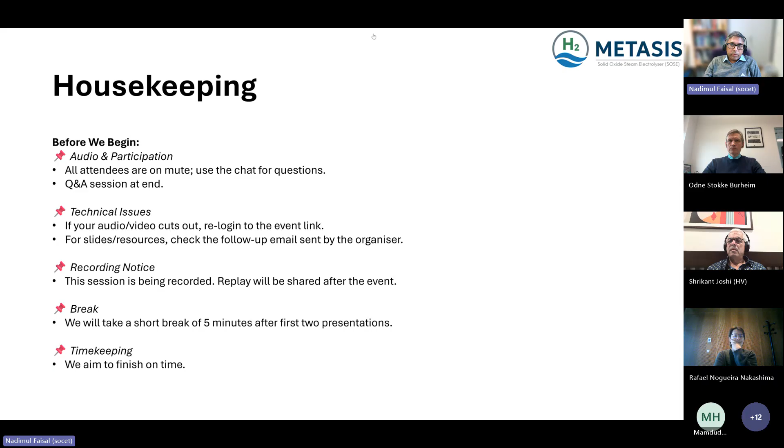Thank you, yeah, thank you. Just one second there, very nice introduction. Okay. Can you see this now? Yes, we can see. Does it make sense what you see, or is it very broad? A bit strange, but we can manage. It's all right. On my screen it's elongated with your slide, just a small part of it. I don't know how others see it, Faisal. Yeah, same here. I need to share it in a slightly different way because I have such a wide screen. Okay, I'll do it like this—is it better now? Yeah, it's better, this is good. Can you see my cursor? Yes, okay, that's very good.

Okay, thank you for inviting me. Today I wanted to talk a bit about the role of solid oxide electrolysis cells in a process called biomass to liquid. The idea is if we take trees as part of a natural carbon cycle and essentially burn them in an entrained gasifier with just a little bit of oxygen, then we can create the syngas. If we do that, we can do Fischer-Tropsch afterwards, and then we have, for example, kerosene that can be used for long-haul aviation. There are some shortcomings in this process—it only uses about 40% of all the natural carbon cycle carbon. Solid oxide electrolysis can make a couple of really good contributions there.

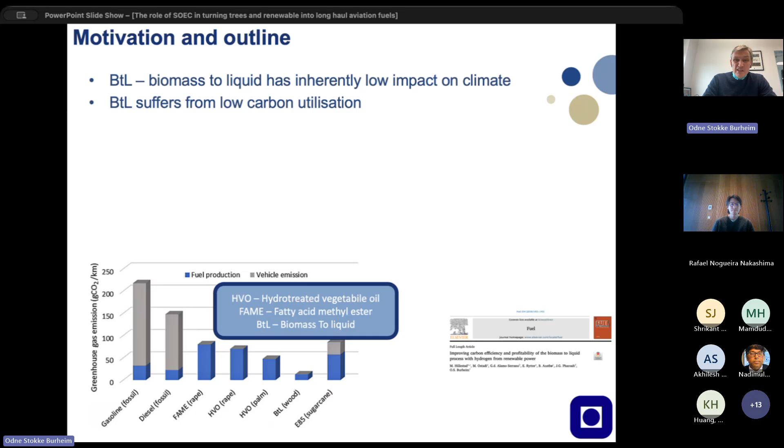So compared to different other types of fuels, BTL is a very promising carbon neutral fuel. It suffers from low carbon utilization, I'll come back to that a bit later. The other thing I want to mention is 2% of global climate emissions stem from the aviation sector. So fighting CO2 emissions in the aviation sector isn't really that big, but I guess since decision makers have a lot of carbon guilt over traveling so much, we still care a lot about this.

If we look into the aviation sector, I think 20% of the emissions from the aviation sector is from flights that are less than 1,500 kilometers. So that's about the length of Norway - if you go from south of Norway to south of Italy, that's the type of distance we're talking. So this type of aviation doesn't really contribute that much, and it's also the only one that can be electrified. But for the remaining 1.5 to 2% of global emissions, it needs to be tackled by combustion and use of turbofans.

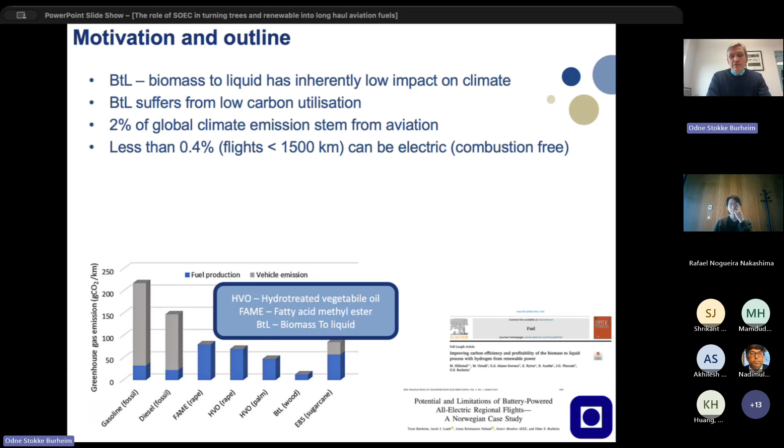So the BTL process, as I mentioned, it starts with biomass coming in, envisioned as forestry waste essentially. It has a pre-treatment, which is essentially drying. It goes through an entrained gasifier, where wood chips together with pure oxygen under stoichiometry creates a syngas that then goes for a bit of cleaning.

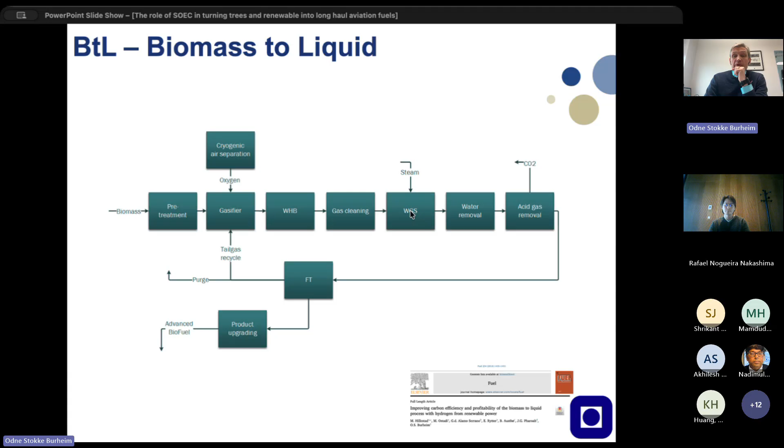And then, by adding more steam, we shift carbon monoxide into hydrogen and CO2. So because when we add steam, we also tie up more of the carbon that could potentially have been fuel as CO2, then the carbon usage or utilization is kind of low.

So that's where we think it's very good to add solid oxide electrolysis, and we have done a lot of modeling work around this. Further, one removes some water as well as some CO2, and then you do Fischer-Tropsch and you have products. So I have a simplified sketch at the lower end of my slides, showing how you can take 100 units of energy in the biomass, or 100 units of carbon, and out comes a little bit below 40% of the carbon in the fuel, and also just over half the energy that's embedded in the biomass.

So now we talk about power BTL. That's essentially when instead of feeding water into the water gas reactor, we're feeding hydrogen. And so then that becomes a reverse water gas shift reactor, and you can see that here. It goes through the same cleaning procedures, and actually, because of the balance between carbon monoxide and hydrogen, it makes sense to have 3 stages of Fischer-Tropsch, and that gives products.

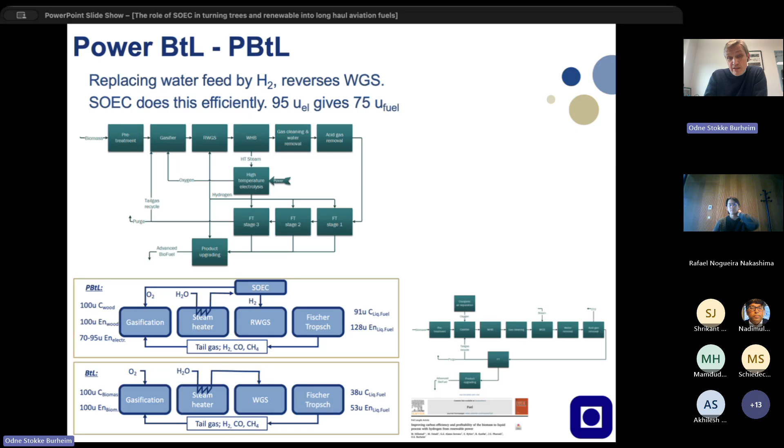The other thing one can see, because this also requires electric energy, if we compare adding 70 to 95 unit equivalents of electric energy, we get 75 more units of energy in the fuel. So this kind of means that we have a very high conversion of electricity into e-fuels and e-SAF. And so in that way, we can envision a wind farm collecting wind, accelerating that through hydrogen, solid oxide electrolysis into a natural stream of CO2, giving us fuels that can provide aircraft propulsion.

In doing this, we have done a little bit of modeling of the cell potential of solid oxides. We have also looked at heat integration. So if you preheat steam, and there's quite a lot of high temperature heat from the gasification, we can envision lowering the cell potential of the solid electrolyzer, balancing out the ohmic losses, and therefore have very high energy efficiencies. And so if you consider the wind to tank efficiency, that's almost 100%, and I think that makes this a very interesting process to pursue.

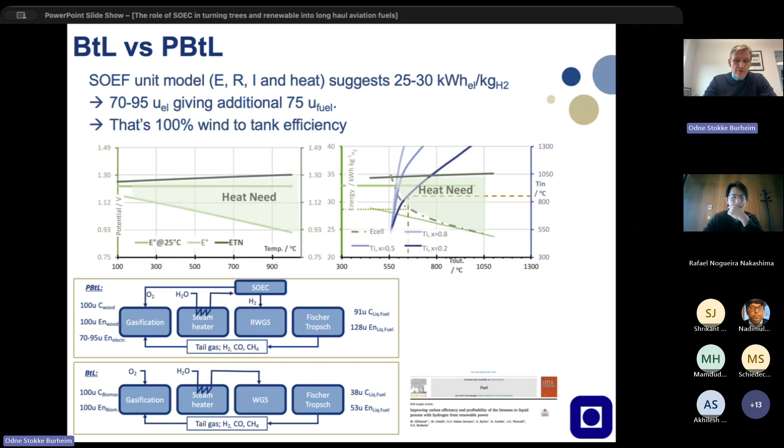So looking at the two processes, we have these mass flow diagrams where you can see the BTL. Very little carbon comes out in the Fischer-Tropsch products compared to what we put in. But for the PBTL, we have a very high degree of the carbon utilized in the Fischer-Tropsch products.

So what we thought we could maybe do to improve this further, if we look at the Fischer-Tropsch, it's quite a bit of carbon monoxide, hydrogen, and very light hydrocarbons that comes out. In the carbon stream, this also presents a bit of energy. And so this is currently fed into the gasification reactor to get more syngas. But we wonder, what if we try to do something else about this?

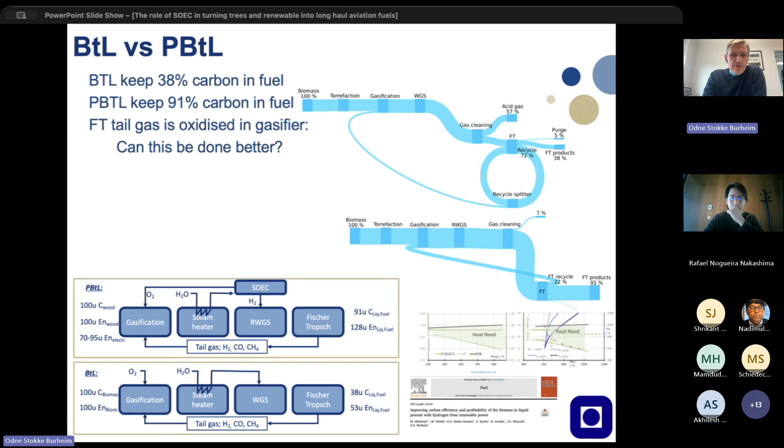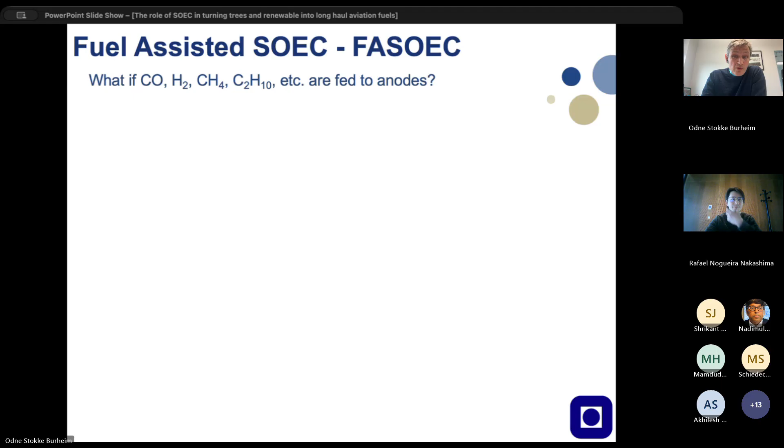So then we come to a concept that we call fuel-assisted solid oxide electrolyzer, FASOEC. So if carbon monoxide, hydrogen, methane, and ethane are fed to the anode of the solid oxide electrolysis, what's going to happen then? If you think about hydrogen only, it would mean that you take hydrogen and water on the cathode side, oxygen goes through, and because we feed hydrogen, it will just produce water. So it's essentially a hydrogen pump with oxygen going through, and this gives almost zero reversible potential.

So carbon monoxide, hydrogen, and methane are experimentally verified to do the same thing. We have also done this with respect to understanding internal thermal gradients in the cells and the thermal balance, and it looks to go very well. We have a couple of papers around this.

And what's also interesting to think about for many other processes with fuel-assisted solid oxide electrolysis cells is that you can take any fossil hydrocarbon and feed it into the anode like this, and then produce hydrogen for very little electric energy because you have available chemical energy. The byproducts of this are really CO2 and water. And if you then cool and quench this, you can envision a very beneficial CCS process. Perhaps not the sequestration part, but certainly carbon capture.

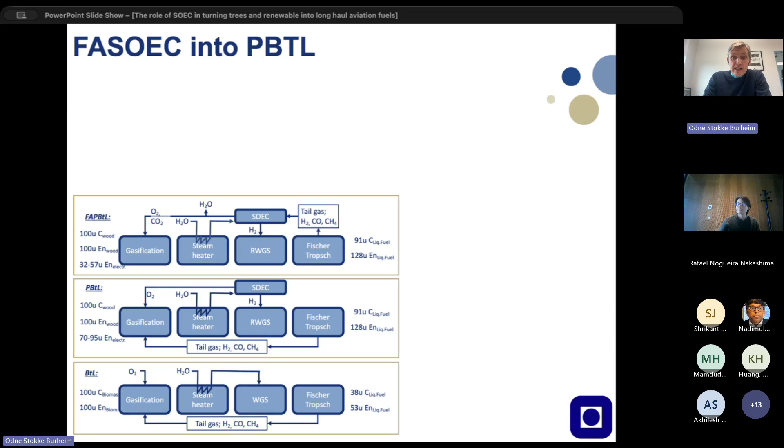But still, it's only utilizing 91% of the carbon, and we would like it to be more. Because it takes energy and resources to transport forestry material to such a site, and utilizing that carbon for making more fuel, we think would be beneficial. So that's what the FASOEC is about. It's utilizing the residual tail gas better.

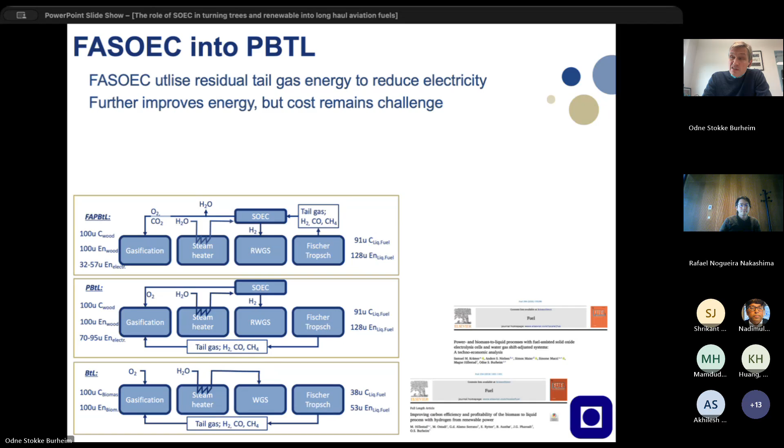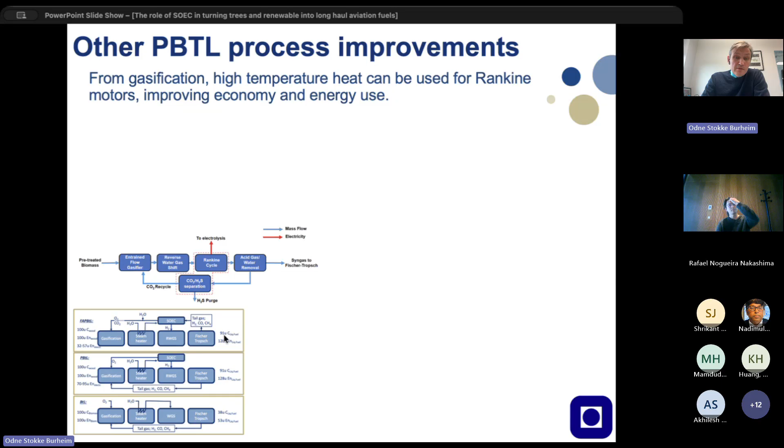The cost of such a system goes up because solid oxide cells have a cost. But when we look at the process for whether it's the fuel-assisted power BTL or just the power BTL, a lot of the carbon is lost in cleaning up the acid gas removal. So if we could separate CO2 from the acidic gas, which is mainly hydrogen sulfide, then we could recover even more carbon. And so we're talking about taking maybe 80% of the residual 9%, adding sort of another 7 points. And then we can get this 91% utilization up to 98.

And so this is an initial study. It's currently under review. So we see a carbon efficiency going up a lot with this separation of CO2 and H2S. However, also the cost goes up. So it sort of becomes a question of how much one is willing to pay for this type of additional fuel. But it is a source of carbon neutral electro-fuel, and I think that will become very important in the years ahead.

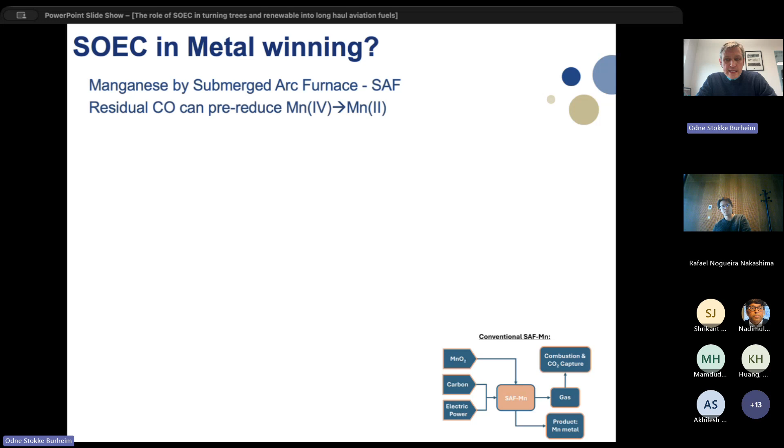This is an industry that's keen on improving. So what they did next was start pre-treating the manganese 4 with carbon monoxide to get manganese 2, so MnO, going into the submerged arc furnace.

It turns out that hydrogen does this several times faster. Hydrogen is a much better pre-reducing agent for manganese. Now, in this process, they still use carbon monoxide, but we're arguing that what if we take that carbon monoxide and

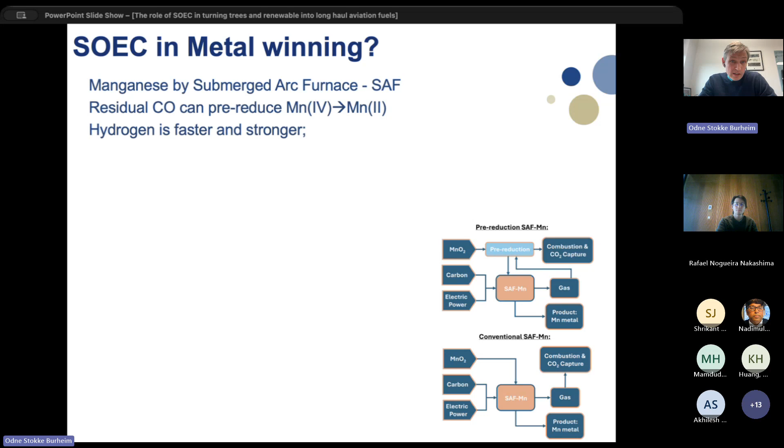feed it into a solid oxide electrolysis cell as a fuel-assisted solid oxide electrolysis cell. Then we can make hydrogen that they can either sell or use for this pretreatment. So that's essentially what this study is about.

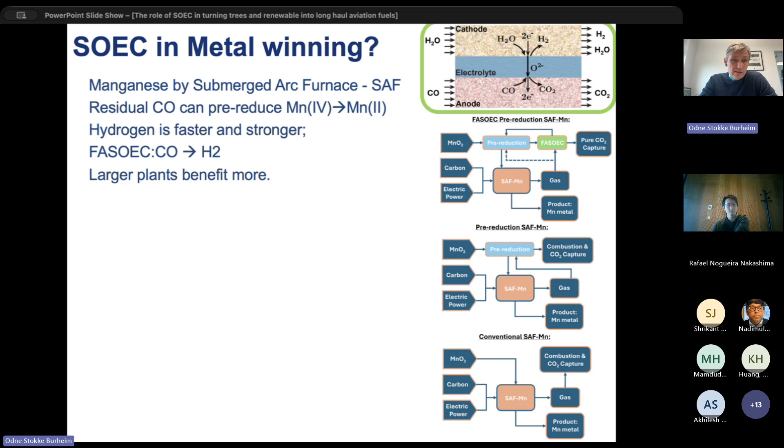Producing hydrogen from carbon monoxide, and these gases are also available at very high temperatures, so that's also good for this process. We found that larger plants benefit more from this, and preheating of steam is a bit important.

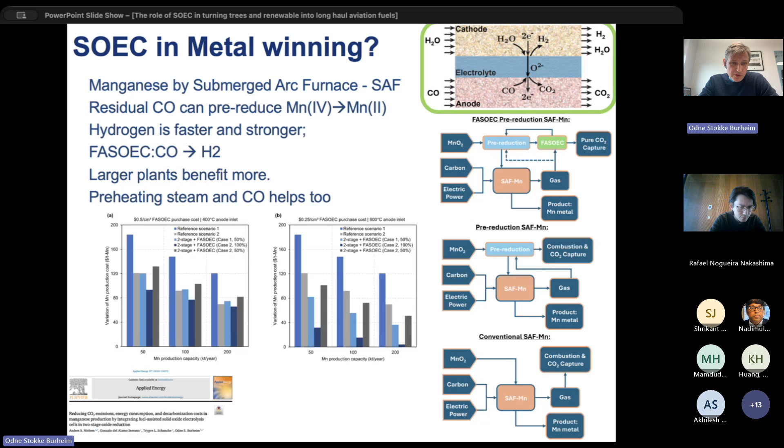And so if we look at the different cost of anodes, of electrolysis cells, we assess a price per square centimeter. It also matters a lot for how this sort of improves the economy of such systems, which we published a year ago. And that's my introduction to what solid oxide cell systems can be used for in making sustainable aviation fuel, and also in the metallurgical industry.

So what I've planned for today is divided into two parts. One is about the context of heat integration—what is the thermodynamics, what the system looks like, and what key manufacturers are saying about this. Later I will pair this with some of our own studies to exemplify and explain the possibilities and limitations in this field, and finish with a message, which I hope will be a good one for you.

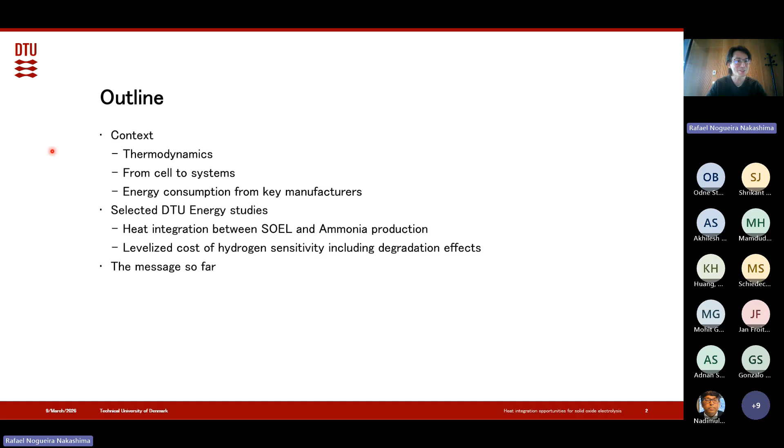So, all right, what is the context of heat integration? I found this very nice graph from Topsoe to explain where these opportunities come from to use heat to produce hydrogen. This comes from the thermodynamics. If you see this graph on the right, it's temperature versus the enthalpy of formation change of the reaction—the hydrogen formation reaction. That's this green line here, and you see something very interesting.

You see that below 100 degrees, this value, which relates to the total energy demand, is much higher than the value you have for higher temperatures. The reason is that at low temperatures you have liquid water, and at higher temperatures you have vapor water. The difference between liquid water and vapor water is some energy that you can pay as heat—this dashed area here.

And this is a huge gain, for instance, for SOEC, because suddenly low temperature electrolysis—PEM, alkaline—they cannot escape from these limits on thermodynamics. But for high temperature electrolysis, you can pay this energy demand as steam.

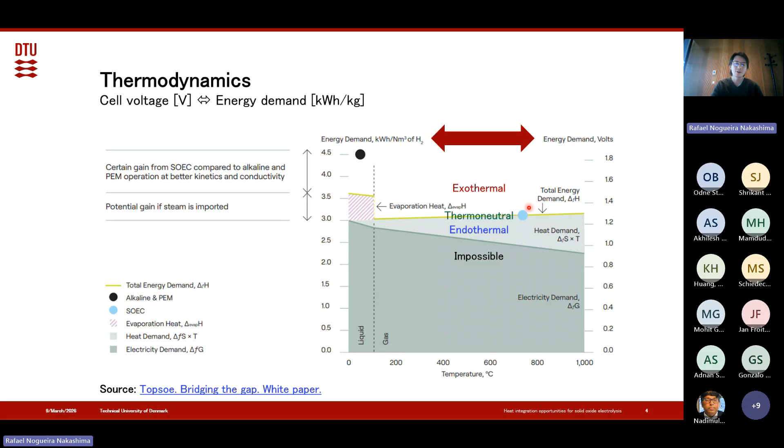You can see that in order to provide the reactants at the high temperature this stack operates at, you need both an electrical heating system and a heat recovery system, because it's very difficult to supply heat at these high temperature levels.

So usually in the system design, what you do is provide this as electrical heating, not as heat from some other reaction or process.

You'd expect, for instance from the stack, to increase efficiency because you're operating in this endothermic region, where you're paying not only electricity but also heat for the reactants. You would expect a higher efficiency when you go into that region.

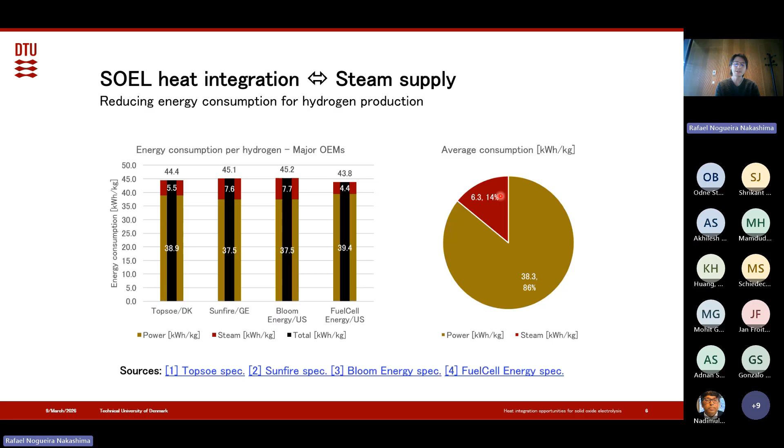And that's where I want to introduce some of these recent studies from DTU, in which we evaluated these opportunities to integrate SOEC with a downstream process, and also what is the impact of this on the cost, the final cost of the hydrogen, to get a better sense of the edge that we can have here with heat integration.

And the first one that I want to showcase is this work from Matthias, and he's in the audience. So hi, Matthias, I hope you're doing fine.

And you can see the ammonia synthesis is a very exothermal process. So you can actually recover some of this energy as heat through a heat exchanger network, and therefore produce steam to provide to the SOEC.

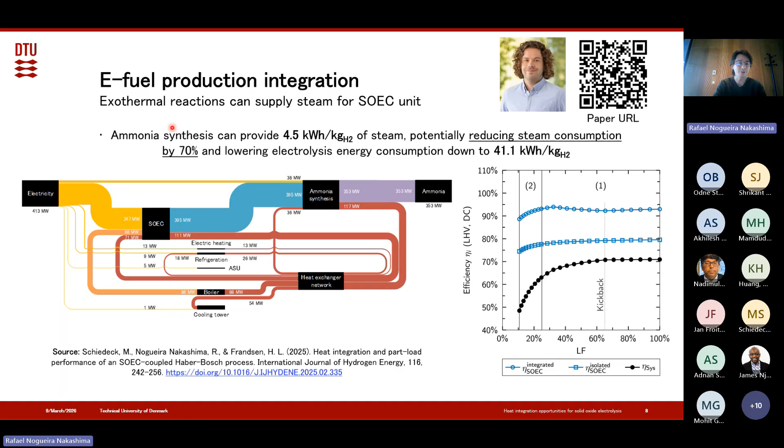A second study that I want to highlight is a study done by Javed Bayrami, and he looked at a lot of different types of influence on the sensitivity of the hydrogen cost, from capacity factor to degradation to size of the modules and so on, to see what we can do to minimize the cost of hydrogen and get to the point of €1 per kilogram.

And that should not come too much as a surprise if you were paying attention to the presentation, because you can estimate how much is the impact of the cost of heat on the hydrogen, if you know how much the energy cost is proportionally to the cost of the hydrogen, and how much you can pay this energy as heat.

From thermodynamics and manufacturer data, the amount of energy I can pay as heat is about 10 to 17% of the total energy required to produce hydrogen. If energy is 55% of the cost of my hydrogen, then I have a range of about 7% cost reduction between the worst case of paying everything via electricity and the best case of paying everything from an external process. Usually, because of heat integration and other factors, this number will be even lower than 7%, since you recover some heat in the system. So it can be 3 to 4%, or higher if you have a very expensive electricity system, increasing the proportion of energy's influence on the levelized cost of hydrogen.

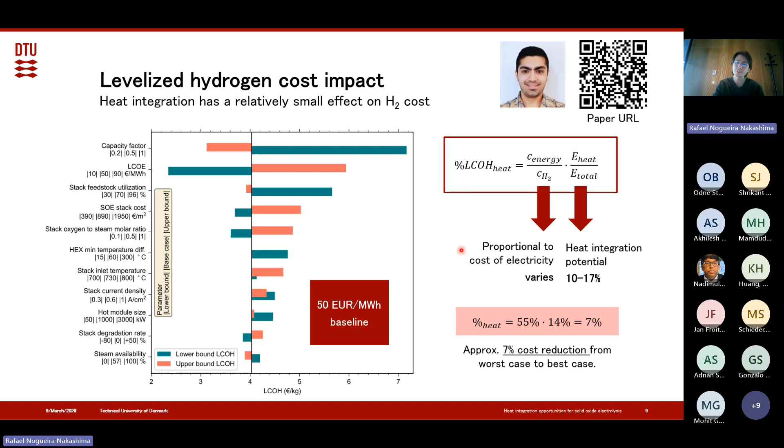So the message so far can be seen from two angles, like a cup half empty or half full. From the half-empty side, heat integration alone will not drastically reduce hydrogen cost, it will not be the panacea or the reason we reach $1 per kilogram hydrogen. That's the pessimistic view.

But the optimistic view is that this also indicates the SOEC technology doesn't necessarily need to be close to, say, an ammonia plant. It doesn't necessarily need a heat source available nearby. It can actually thrive even in the absence of this, because the influence of heat is small compared to the other parameters we've evaluated so far.

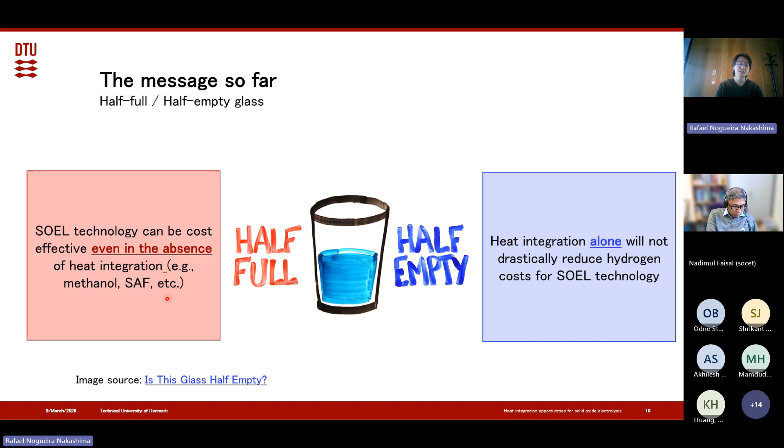For instance, the cost of electricity. So that also opens, from the commercial side, a lot of possibilities for high temperature electrolysis, not only on ammonia plants, but also in SAF and methanol plants, where heat is actually scarce rather than a surplus.

Finally, I want to highlight that we are working on an IEA task, producing some state-of-the-art reports. So stay tuned if you're interested in seeing more about electrolysis in comparison, and specifically about the Danish case. You can sign up for the mailing list using this QR code, or just reach out to me via the contact info.

And with that, I thank you all for the attention. I hope that didn't blow the time, I wasn't checking on that. So thank you very much.

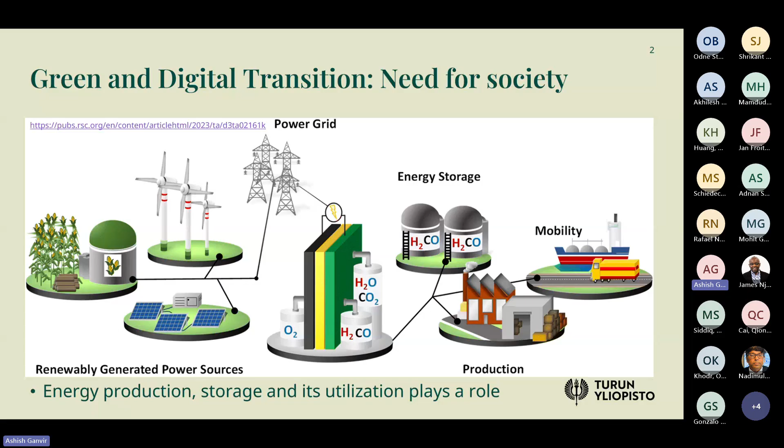So now when we think about all of these three pillars, many of these energy system devices in either of these pillars have for sure gotten a lot of attention during the last 5-6 years, and there is a lot of rapid development happening. So be it SOEC, on which we already had a couple of talks, or SOFC, also batteries, more advanced batteries such as solid state or sodium based, etc.

And also the green fuels such as hydrogen, ammonia, how they are actually used to create work or energy using engines, for example. So all of these aspects, there is one thing that is common, in my opinion, is that most of these devices are quite complicated or complex because there is a certain architecture which is multi-material. For example, if you look at SOEC, you have a metallic interconnect, then you have three different functional layers, the electrodes as well as electrolyte and the metal support. So this is one type of SOEC.

Similarly, if you look at solid state battery, there are two metal current collectors, and inside you have the active battery electrodes and also solid electrolyte. And then if you look more towards the third pillar, the utility side, we have the engine - I'm taking an example of one component, a turbine blade, which is a structural component, and then you have functionalized that component using several coatings such as bond coat, environmental barrier coating, thermal barrier coating, to provide different types of functionality.

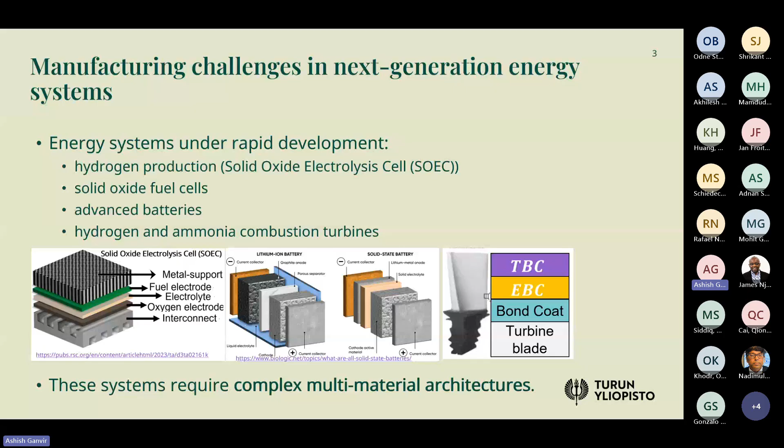So this is essential if we want the components to really perform efficiently. If you carefully look at, say, just SOEC, there is a certain role for each constituent here - be it a hydrogen electrode or oxygen electrode or a barrier layer or a solid electrolyte. Each of these constituents has a different material, and also needs different characteristics in terms of microstructure, thickness, let's say it like that.

So when it comes to manufacturing them, because these are different materials with different requirements, it is not quite straightforward. If you look at the traditional manufacturing route for some of these devices that I showed you, basically you prepare the powder or a slurry, and then tape cast or screen print, sometimes heat treat or sinter them, and then try to consolidate or join them on top of each other, so you have a fully functional device.

So each step basically brings in some sort of complexity, and when put together, the complexity is definitely increased manifold, particularly because these materials have different properties, especially at high temperatures. For example, the thermal expansion coefficient can be very, very different, and so the interfaces may behave quite differently compared to at room temperature.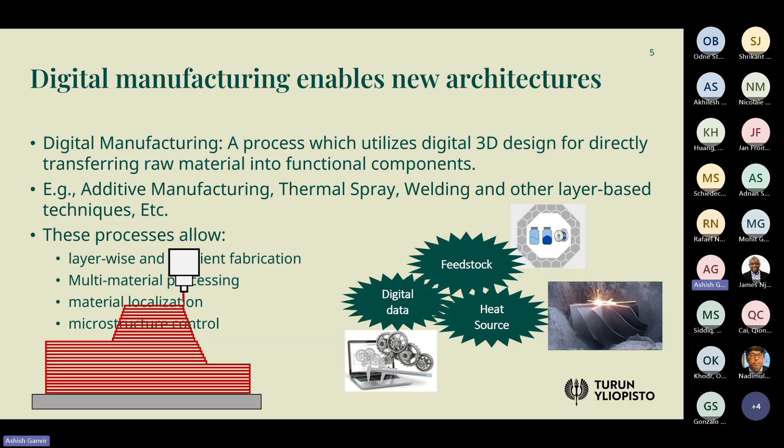And this gives us a freedom, or motivation, to try out and explore some of the devices that I showed you, which are not so commonly used or explored for these laser AM or thermal spray methods, right? So I'll basically describe both the laser AM and thermal spray.

So for laser AM, which is particularly interesting for creating structural parts, there are two main methods. One is powder bed fusion. The other one is direct energy deposition.

In both cases, we use laser as a source. Both have their own advantages and limitations. But one thing that is very common in both of them is that they both provide the possibility to design quite complicated structures. So, for example, the one that you see here is made out of a nickel-based and copper-based alloy.

It's a porous structure. So the powder bed fusion definitely gives you more freedom to create a complicated structure than DED, but both of them, compared to the state of the art, allow you to create complex geometries.

The material efficiency is also quite high, and you can integrate some complicated features like cooling channels in devices like, for example, turbine blades, or maybe the interconnects or metal supports that you're using in various devices that we just talked about. And this technology is also quite suitable for remanufacturing.

So if you believe that there is a part that is going to fail, you can actually just locally repair that instead of changing it. So that also provides some sort of sustainable aspect to this. In general, the technology can create complicated structural components for energy systems, right?

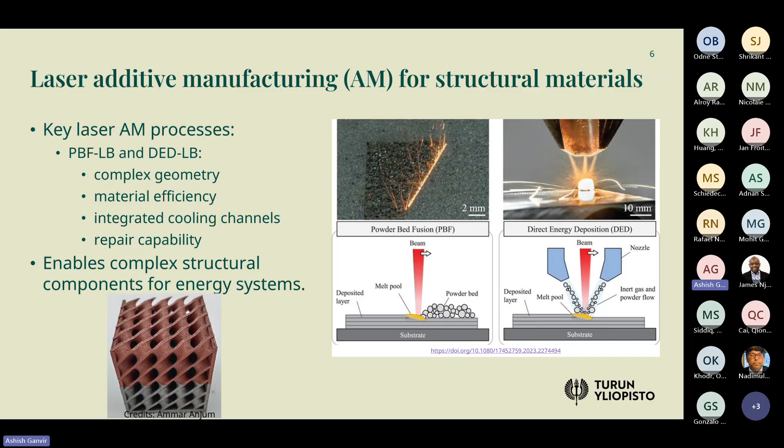But the structural components are often not enough. You need to functionalize them, and that's where the coatings come into picture. Thermal spray is a very versatile technology and has been used for many applications for many years.

It is quite new to some of the niche applications in the energy domain, like batteries, for example, or maybe even in SOEC. It's coming into its zone right in the last couple of years or so. But there is definitely a lot of scope here, and the most important thing is that it provides deposition rates that are sort of unbeatable with any of the traditional methods, right?

So for an industry, it's very appealing. It also gives you flexibility to create coatings out of any sort of material, ceramics, metals, polymers, and their composites. And it's quite mature in many applications. For example, thermal barrier and environmental barrier, the technology has been already very well used and matured. On the other hand, in some cases like batteries, it's still getting its role, right?

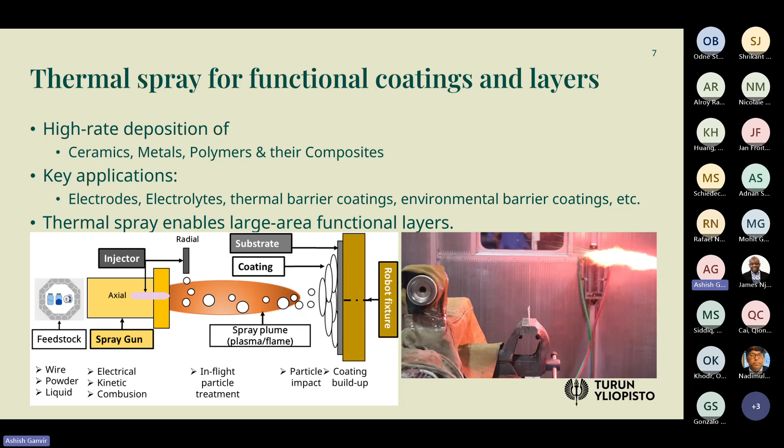So I'll present you two case studies of the research that we do. The first one is the use of thermal spray for batteries, and this is a recently concluded project together with University West in Sweden, LiFeSiZE in Sweden, and Fraunhofer in Dresden, together with UTU.

What we try to demonstrate here is that thermal spray can be a method that can be really looked at for applications where the deployment of the technology is really at the edge of whether we can actually create these devices fast and also economically appealing for the industries, because the current traditional routes that are there are very slow. They have multiple steps, and they can create their own challenges, right?

So there were some preliminary hopes that we had, and we've also demonstrated some of the examples already here, and you can read more about this particular project. We have a public report also available on the EU website for this particular project.

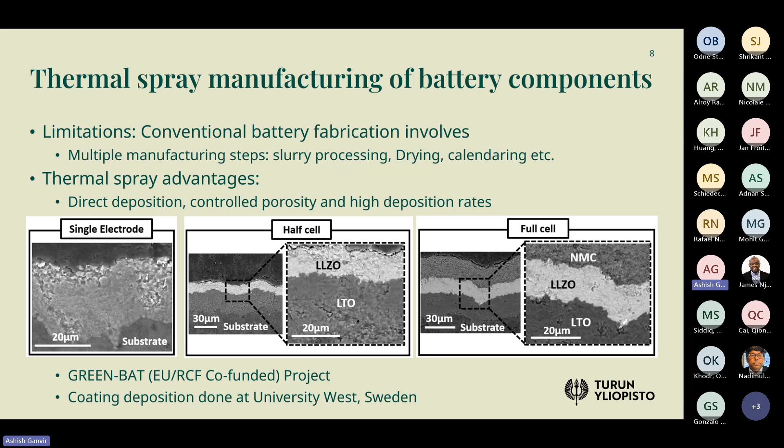The other case study, and this is more of my own research that I have been conducting for quite many years, is how thermal spray can be used, for example, to provide functionality to engines.

Now we are talking about deploying hydrogen and ammonia for combustion in engines. And obviously when we do that, the existing structural components, be it additively or 3D printed manufactured or traditionally manufactured, would need some modification in terms of materials or design.

But also maybe there is a scope to provide some additional functionality by adding coatings, where thermal spray can also play a role, because these systems operate at extremely high temperature and aggressive, corrosive conditions. So you need protection. There are, for example, thermal barrier coatings or environmental barrier coatings, which are used even in today's state of the art to protect these components from these aggressive environments.

And because when you burn hydrogen or ammonia, we do not really know how the structural components are going to react to this kind of new fuel. There is also some sort of challenge on whether the existing coating systems will survive or there will be a need of different systems, right? And so even here, this whole system is consisting of different materials.

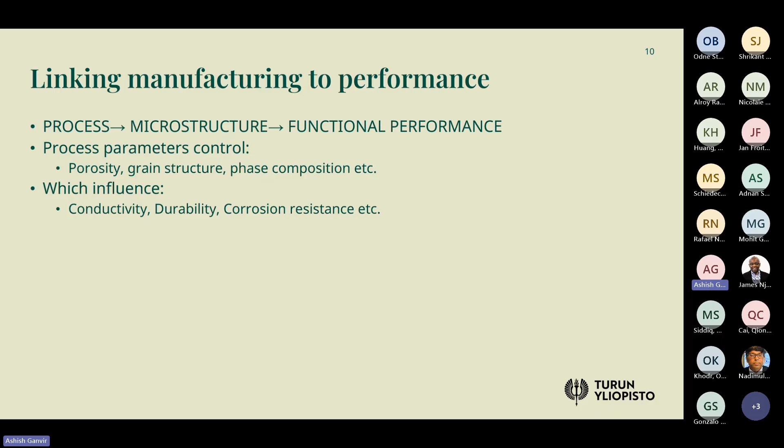So to give you an example, in one of our research, what we tried is we fixed the raw material, the feedstock conditions, and varied the process parameters, and you can see the sort of distinct microstructures you can get. So without getting into the details of what these were for, the important message here is that if you can vary the structure so much from one end to the other, you can expect a significant change in the performance.

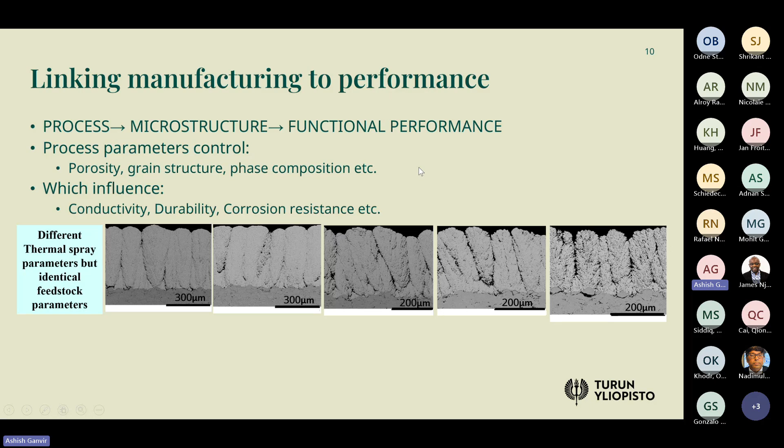And similarly, in another case, we fixated the spray process parameters, but just varied the raw material conditions, and you can see the same sort of change. So the message here is that it is very sensitive, right?

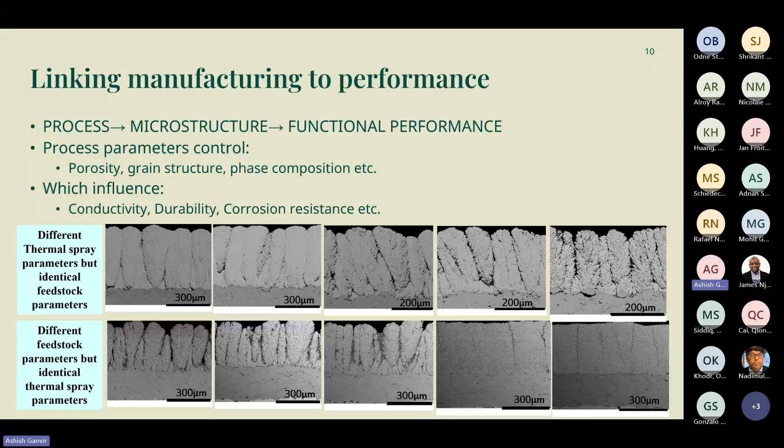So be it thermal spray here, or I would maybe take one more slide - I don't have it here, but just trying to tell you that the similar effect is also quite evident in the laser AM processes. Of course, the structure looks different there, but it changes quite rapidly. So there is a lot of sensitivity. It needs, I mean, both of these techniques need a lot of control over the process.

Now, if you would like to make the transition from lab to really the industries, because both the technologies, because of their high deposition rates and already sort of accepted technologies by industry for various other applications, it is quite appealing. But at the same time, there are challenges because of the reproducibility of the microstructures, right?

There is a quite sensitive process, and also there are not so many, at least in the laser AM community, process experts who can actually do this repeatedly. So despite the fact that these processes are scalable and compatible with various industrial needs, because of the reproducibility of the microstructure, there is a bit of a challenge.

And this can be tailored and has already been, to some extent, solved. So nowadays there is a lot of this digital transition where you try to modify your existing process by introducing sensors, using artificial intelligence and machine learning to automate and control your process so you actually get very repeatable structures.

So these are the steps that need to be taken to really make sure that these reproducibility related challenges, which increase by many fold when you're actually trying to use laser AM or thermal spray or a combination of it to create the whole stack of a system, be it SOEC or the turbine blade coated with thermal spray coatings or a whole battery cell, are addressed. Therefore these aspects are very important.

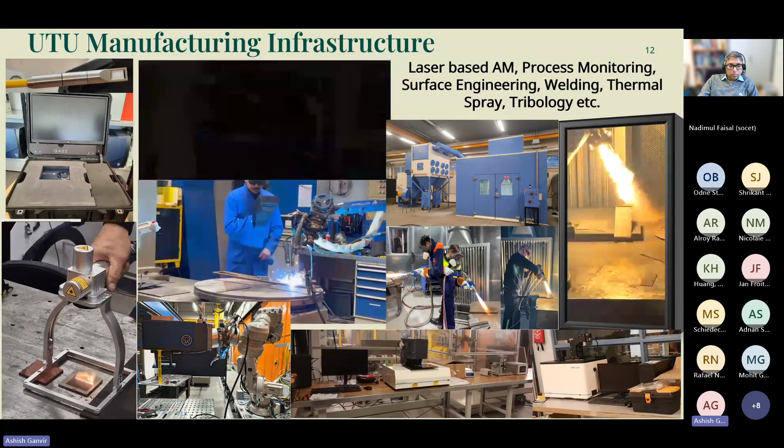So yeah, we look forward to various collaborators, especially in the field of SOFC, SOEC, batteries, which are quite new to us. But we feel there is a lot of promise in these kinds of technologies.

So in conclusion, I would say when we talk about sustainable energy systems, we should look at the three pillars: production, storage, as well as use. And all of these require multi-material architectures. Even though there is scope to develop new materials, I would say that even the state-of-the-art materials can be considered good enough.

Despite that, there is a slow deployment of these technologies, and in my opinion one of the major reasons is the manufacturing. So that is a bottleneck, and we need to solve that. Digital manufacturing methods like laser AM and thermal spray, just a few examples I'm giving - there are many others that can definitely provide a solution that is scalable and also appealing for the industries.

So the most important thing in these processes is to mature this process-structure relationship. So the last statement is that advanced manufacturing or digital manufacturing will definitely play a critical role in enabling next generation sustainable energy technologies.

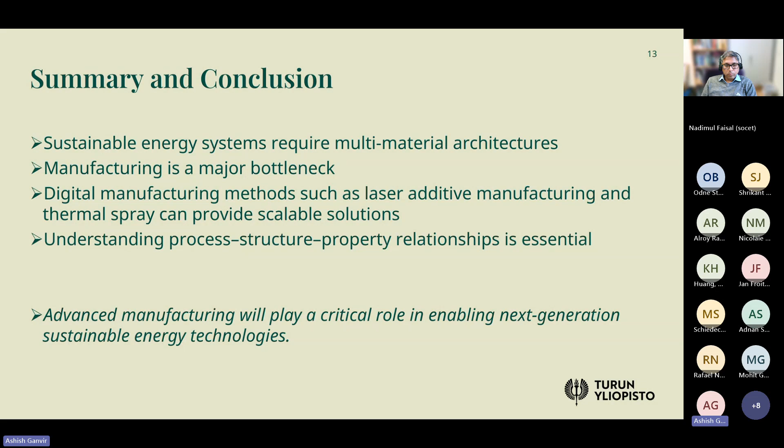Right, so if I may invite the last speaker, Professor Jan Froitzheim from Chalmers. Hello. Hello. Yes, you wait a second, I'm trying to get my screen ready here. Sorry, I'm almost ready, just need to find the share. So now you should be - yes, we can see my screen, I suppose, right?

Yeah, all right. So my name is Jan Froitzheim from Chalmers University of Technology, and I'll be talking about interconnects.

One slide on Chalmers, if we're talking about collaboration with the Nordics. We're located in Gothenburg, a technical university with about 10,000 students and 3,000 employees. A foundation university founded in 1829, but we're different to many other universities - we're not state-owned, but actually a private university or foundation university.

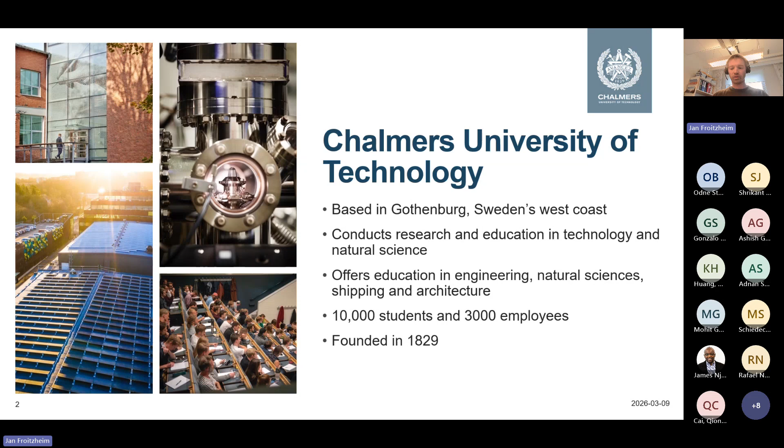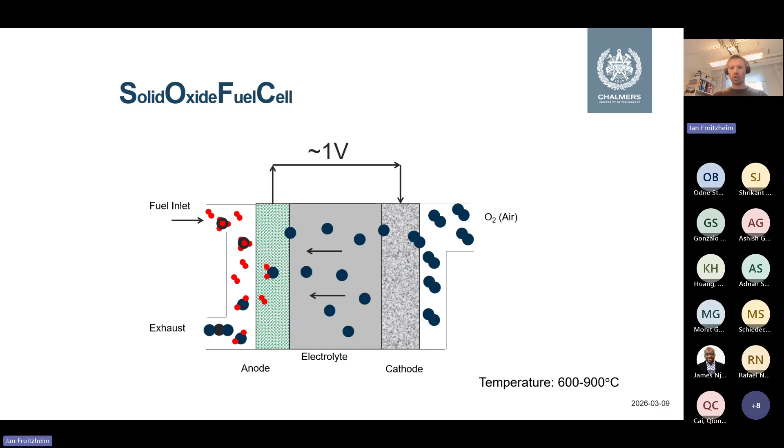So this is a schematic of an SOFC, and you have seen others before today. One SOFC or fuel cell gives you about 1 volt. So what you do in practice is connect many cells in series, and what you have to keep the gas compartments separated is the interconnect. So it's separating the gas compartments, manifolding the gas, and also part of the electric circuit. This is the same for SOFC or SOEC - that doesn't really matter in this context.

So you need something there which is the interconnect, and the most typical material used is iron chromium steels, so ferritic stainless steel. Why do we use ferritic stainless steel? The main reason is the similar thermal expansion coefficient compared to the ceramics. The steel itself also has good electrical conductivity, is relatively easy to form, and cheap to produce.

So, okay, this is stainless, but at the high operating temperature, we're talking about 600 to 900 degrees C or something like that, the steel is not so stainless anymore, but forms an oxide scale.

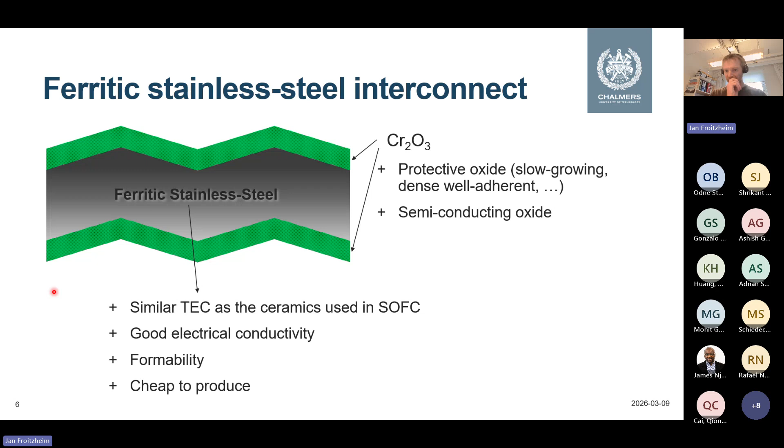And so we basically get a chromia scale, Cr2O3. And that is good because that protects the steel from further corrosion—it still corrodes, but it corrodes slowly. And the chromia is reasonably conductive. However, it's not a great conductor compared to other oxides, particularly those used in the air electrode. So it increases the electrical resistance with time.

It requires a continuous chromium supply. So if we don't continue to supply chromium here at the metal oxide interface, the chromia scale will start to form iron oxides, which grow much, much faster. So that we need to avoid.

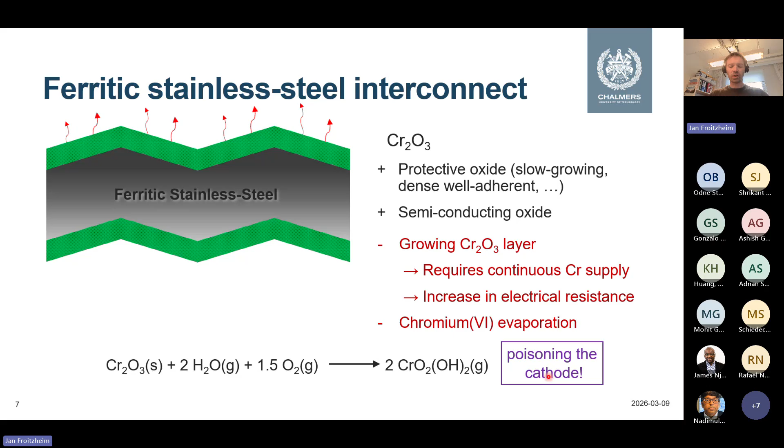Another problem is that we have chromium-6 evaporation. At high temperature, you have this chromia together with water vapor and oxygen forming this chromium oxyhydroxide, which is poisoning the cathode if we're talking fuel cell. So that is a problem, and that's a well-known problem.

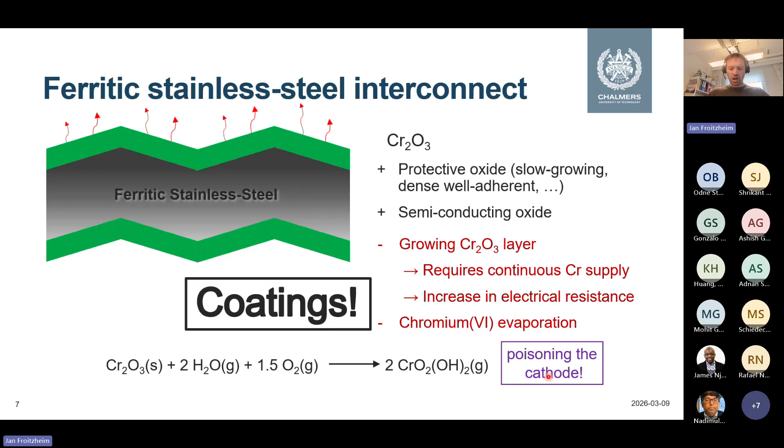And then we have also a lab for corrosive gases, not so super relevant maybe for solid oxide, but then we have also what we call the low PO2 lab, where we can run 100% hydrogen, methane, CO, and so on—all the more nasty stuff.

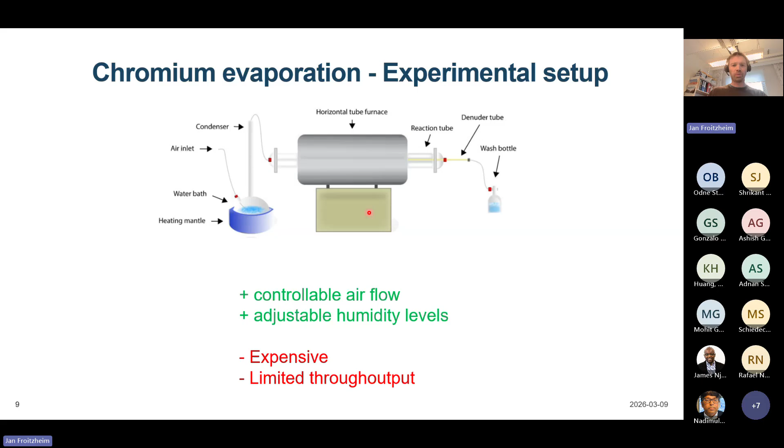So the advantage of this setup is we have a very good controllable airflow. If you just have an open furnace, you don't really know what airflow you have, and your humidity varies depending on whether it's summer or winter and stuff like that. So we can adjust that pretty accurately. However, it's more expensive, and we have much more limited throughput compared to if you have one box furnace where you can put in, I don't know, 20, 30 samples at once.

Here's a little bit more detail of the setup we are using. So you have the gas coming in here, left-hand side. Here's our sample—this is the tube that is in the tube furnace. And then downstream of the sample, you have this quartz tube, which I call a denuder tube, which is coated with sodium carbonate.

And the trick with the sodium carbonate is that the chromium oxyhydroxide reacts with it and forms sodium chromate. So that is deposited in the tube, and then we can just remove the tube without touching the samples, replace it with a new one, and then leach that tube with water to get the chromate solution, because it's water soluble. Then with spectrophotometry we can measure the chromate content in the solution. Pretty straightforward.

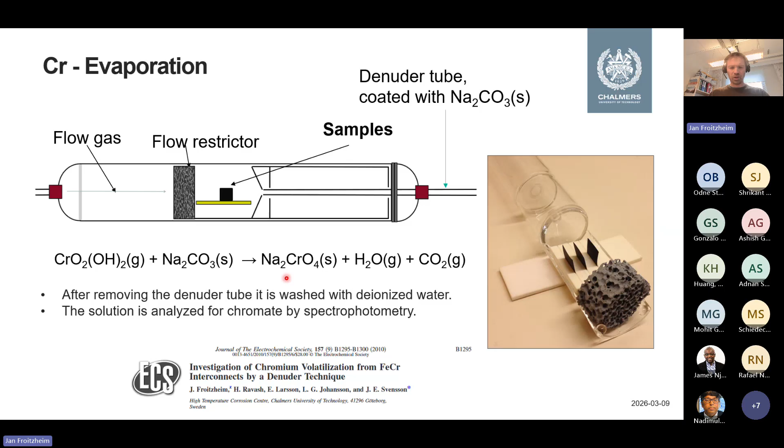We developed that quite a while ago, and I'm using it quite frequently, and some other labs have also started to use this. To verify this, we used chromia pellets that were weighed before and after the experiment, and the weight loss of the chromia pellets should correspond to the amount of chromium we find in our solution. And that actually works.

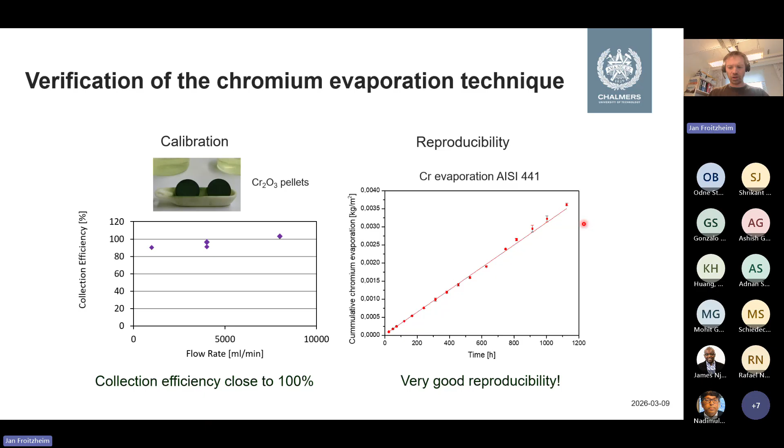So now we can measure chromium evaporation, but we still need to do something about it. And that's where the coating development comes in.

So, we want to minimize chromium evaporation. How do we do that? If we have the typical steel used, iron chromium, there's also maybe 0.5% of manganese or something in the steel. So you get an oxide scale that consists of the chromia scale I mentioned before, or on top of that, there will be a chromium manganese spinel. That will give you somewhat lower evaporation, but it will still be too high.

So what you can do is apply, for example, cobalt coatings. That's what we have been working a lot on. Particularly, we use very thin cobalt coatings, like about 600 nanometers. Then instead of this chromium manganese spinel, you get a cobalt manganese spinel. So the idea is to block chrome evaporation when you have this cobalt manganese spinel.

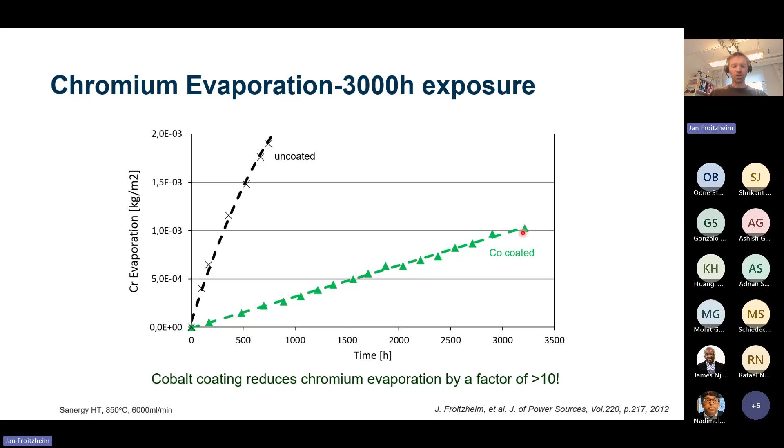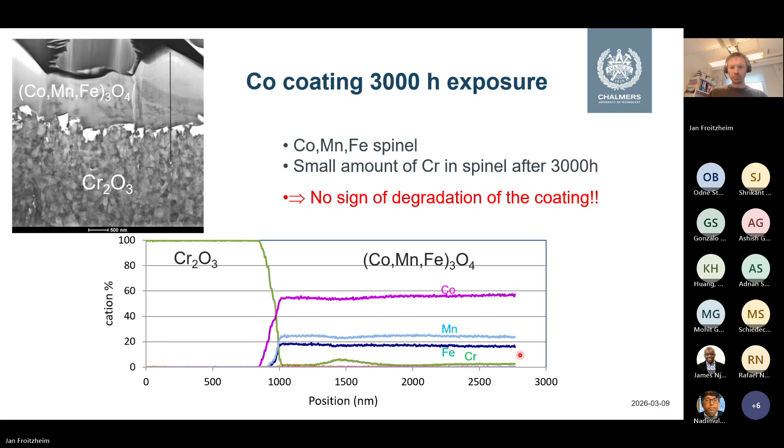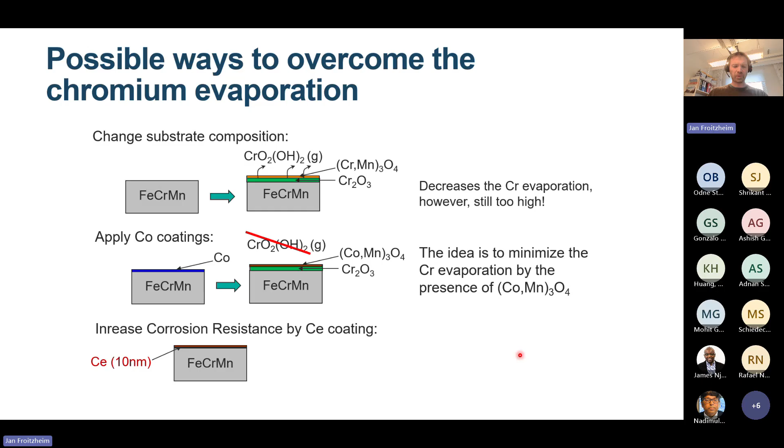Then we wanted to increase the corrosion resistance. To do that, we combined this cobalt coating with 10 nanometers of cerium underneath the cobalt. So you get this combination of cerium and cobalt.

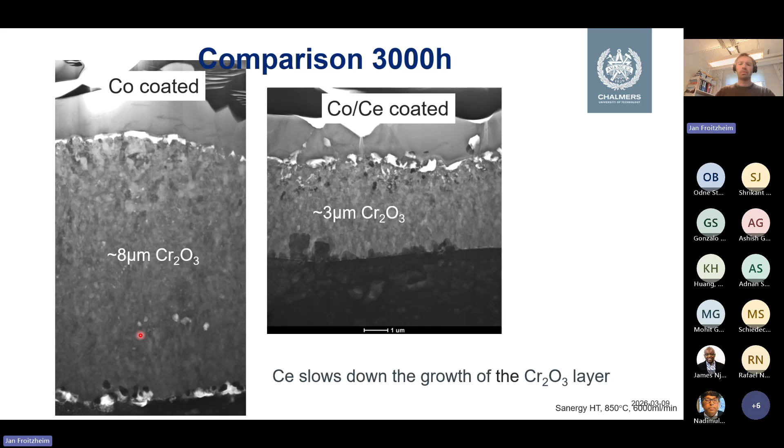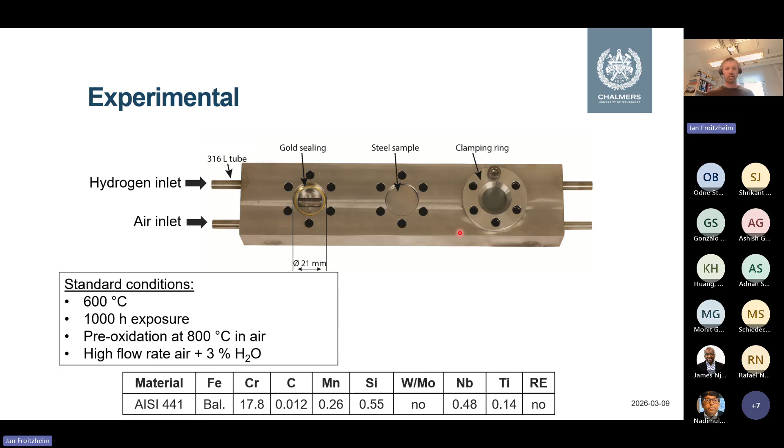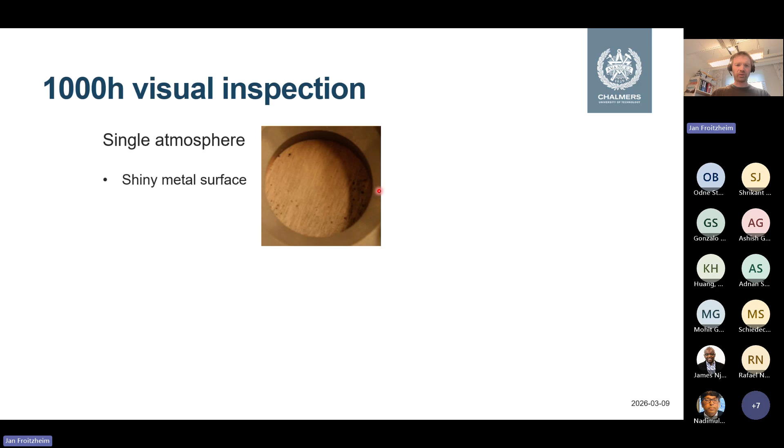So this is after 1,000 hours visual inspection, 600 degrees C, relatively low temperature. You see we have a relatively shiny metal surface, so everything is fine in single atmosphere, air on both sides. However, if you do dual atmosphere, we get breakaway corrosion. Here you see a quite large part of the sample is covered with what turns out to be thick iron oxide, I'll show you later.

So we repeated this experiment and got pretty much the same result. You can argue, well, maybe this is just starting and it would have happened anyway, since you have some spots here. So maybe this would have happened in single atmosphere as well. So we let this run for 3,000 hours, and you see the same spots here. Nothing has happened in single atmosphere, but in dual atmosphere, the sample looks a lot worse.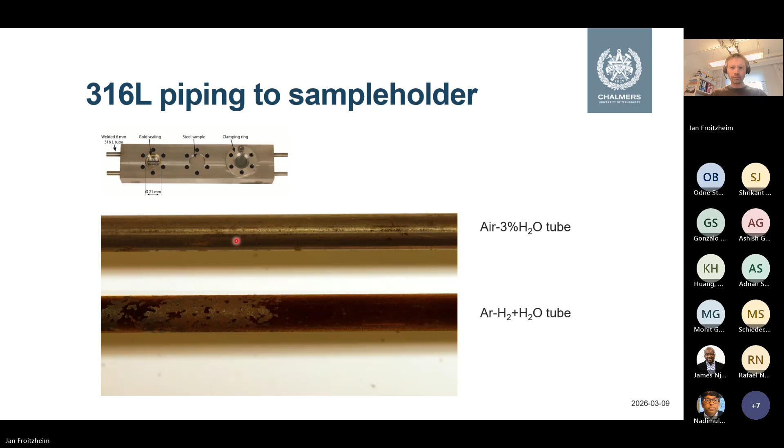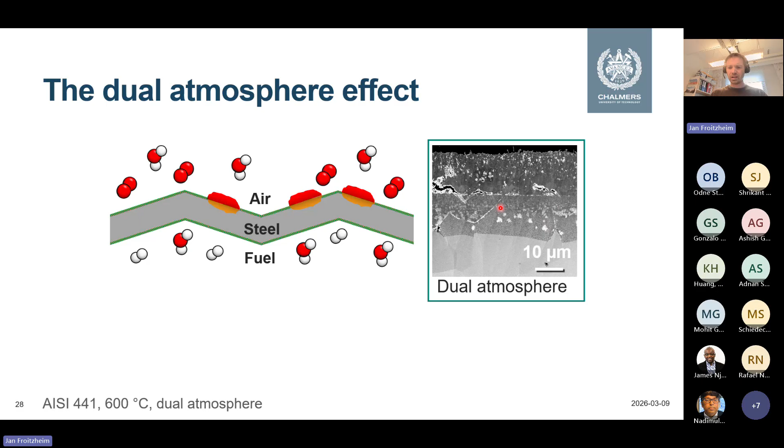So to summarize, basically in air, if we have air on both sides, we get a thin protective scale, and the oxide scale is a couple hundred nanometers. While if we have fuel on one side, it's the air side that is affected with this fast-growing iron-rich oxide, and the sample looks like this, and you get like 30 microns of oxide scale or something, depending a little bit on how long you run it. So it's a massive difference. Instead of this thin protective chromia scale, we get a non-protective iron-rich oxide.

So then the question is, what is going on here? In a simplified manner, we can say that when we have this chromia scale, to maintain it we need to make sure that we can supply more chromium to this metal-oxide interface compared to the amount of chromium we're consuming. If this is the case, if we can supply more than we consume, everything is fine and we keep this protective scale.

However, if the consumption gets larger than the supply, we deplete our chromia scale in chromium and start to incorporate iron, and then we get this fast-growing breakaway morphology that looks like this. Generally speaking, hydrogen is somehow affecting this equilibrium between consumption and supply. Figuring out what is exactly going on is still partly an ongoing problem.

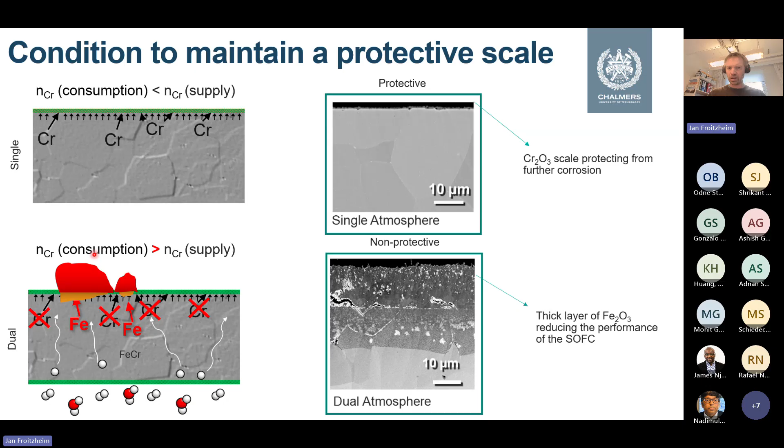But we looked at a lot of parameters that influence this, for example the temperature dependence, the effect of pre-oxidation, the sample thickness, and so on and so forth. I'll just show some examples. One interesting example is the temperature dependence.

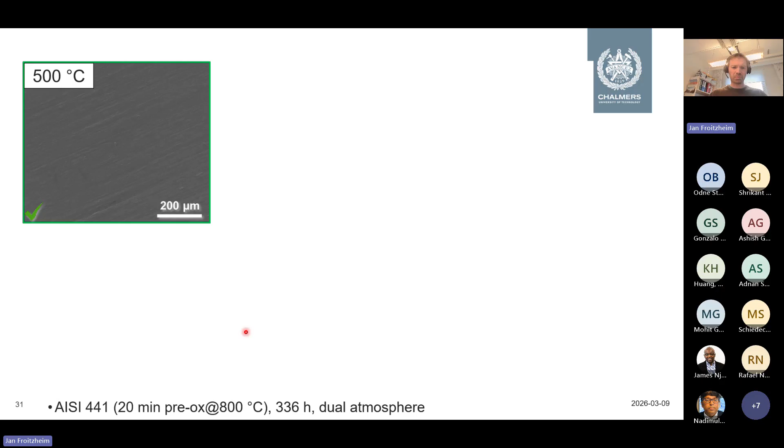At 500 degrees C, with pre-oxidized samples after 2 weeks in dual atmosphere, you see the oxide scale is very thin and protective, everything is fine. If you increase the temperature, things get worse, and you get these oxide islands of thick oxide. 600 degrees C is uniform, but it's uniformly thick - that's basically the cross-sections you've seen before. So then it's a disaster.

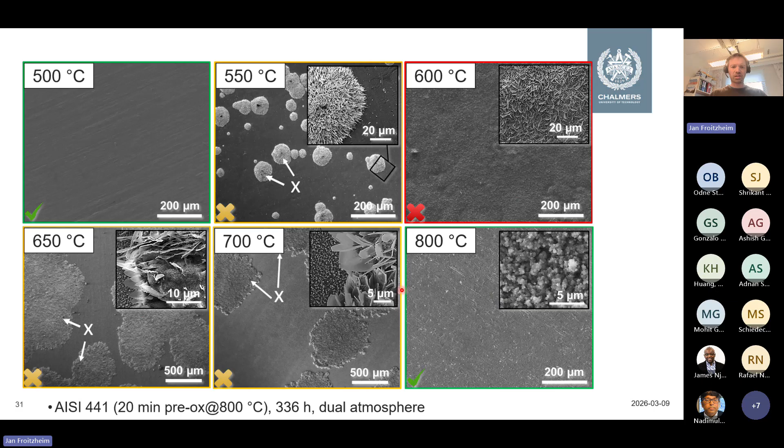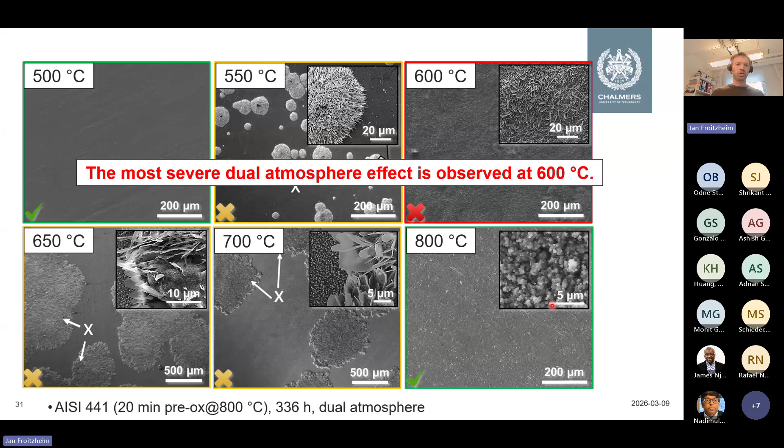Interestingly, when you increase the temperature further, you get a more protective scale again, and at 800 degrees C you have a completely protective scale again. So the most severe dual atmosphere effect is observed at 600 degrees C, and that is a little bit unusual. Usually the higher the temperature goes, the worse things get, and if you go down in temperature things get more manageable. But here, this is not the case.

This suggests that hydrogen affects grain boundary diffusion paths in the alloy, or that's at least what we speculate. I don't really have time to go into all the details, but the grain boundary diffusion contribution is much more significant at 600 compared to 800 degrees C. And below 550, basically it's too cold for much to happen anyway.

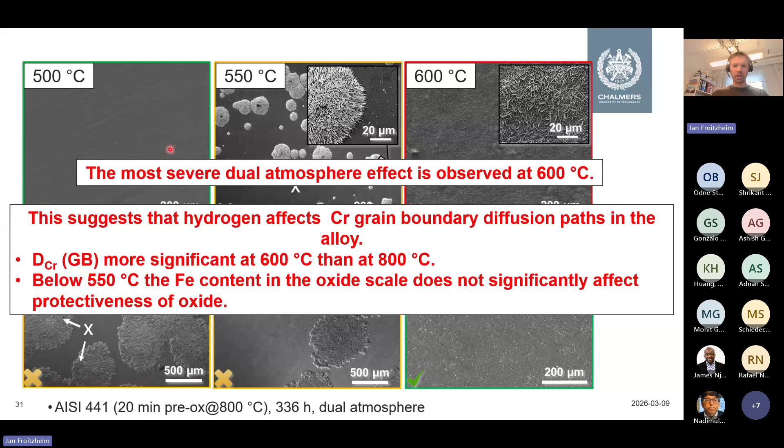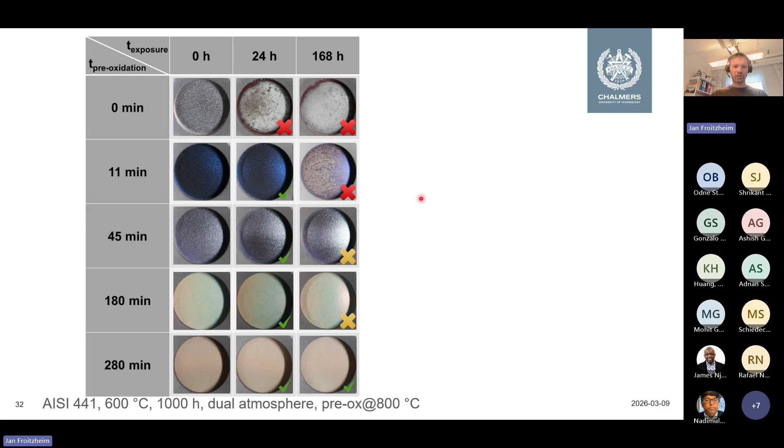So we looked at pre-oxidation as a parameter. These are samples pre-oxidized for different times - this is before exposure, nothing happened so far. After 24 hours, you see the non-pre-oxidized samples already dead, while the other samples survive. Then if you go longer, like after a week, the shortest pre-oxidations are dead, while the long ones look okay.

And that basically continues. So you get a somewhat, I don't know if it's a straight line, but you get some kind of line. We managed to break this 280-minute sample eventually after 1,000 hours, but there is a clear correlation there. Basically we can summarize it that way.

We looked at the effect of sample thickness, and somewhat unsurprisingly, if you thin the sample, it's easier for the hydrogen to get through. We get this most severe effect, while if the sample is thicker, it's a less severe effect.

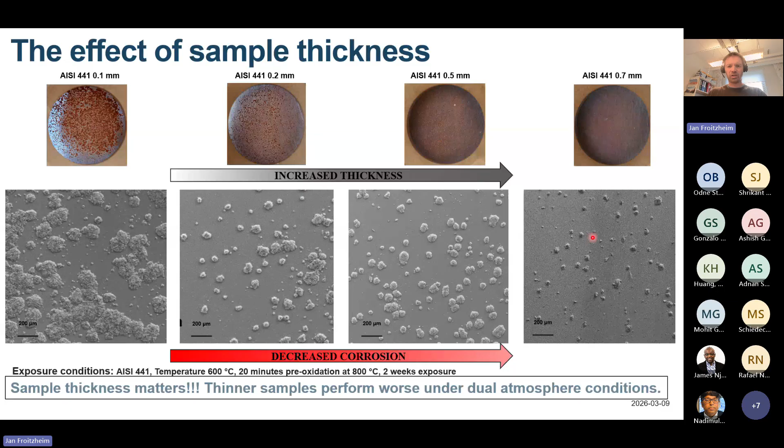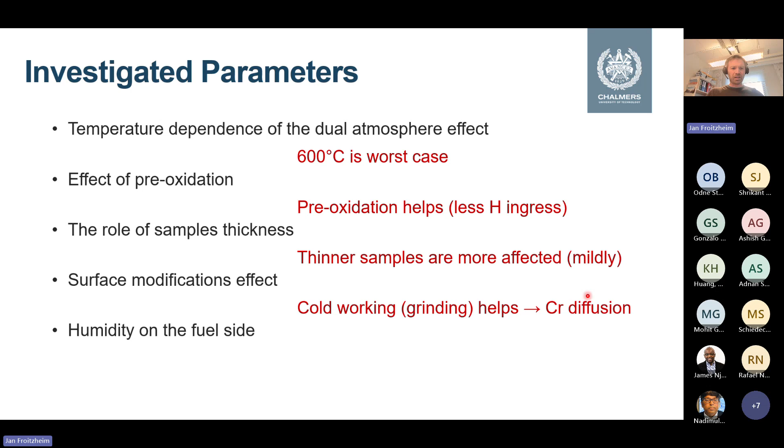To summarize, 600 degrees C is the worst case. Pre-oxidation helps, gives us less hydrogen ingress. Thinner samples are more affected, but the effect is not super strong. Cold working, for example grinding, helps, gives us higher chromium diffusion. And the humidity on the fuel side - if we have dry hydrogen on the fuel side, that is more severe.

Then the question is, what is going on here? From a mechanistic point of view, you can make up all kinds of different hypotheses. This is basically the one that is mostly found in the literature: that hydrogen is incorporated in the oxide scale, and the oxide scale grows faster. This is clearly disproven because whenever the oxide scale is protective, the oxide scale thicknesses are pretty similar, if not - maybe it's the other way around. So you can't compare a thin chromia scale to a thick iron oxide scale and say it's growing faster.

Chrome evaporation, we looked into that - we love chrome evaporation, but it doesn't really explain this. We looked at other things like sigma phase formation, hydrogen reducing chrome activity. This was something we thought for a while might be the case, but we have also thoroughly disproven that. So in a way, maybe the most likely hypothesis right now is that hydrogen affects the chromium diffusivity, in particular at the grain boundaries. That's what we believe, but we don't really have full evidence right now.

I think now I'm 18 seconds over time, if I see it correctly here. So this is basically what I wanted to show you. Now I need to find my team again, but I'm basically done with my talk.

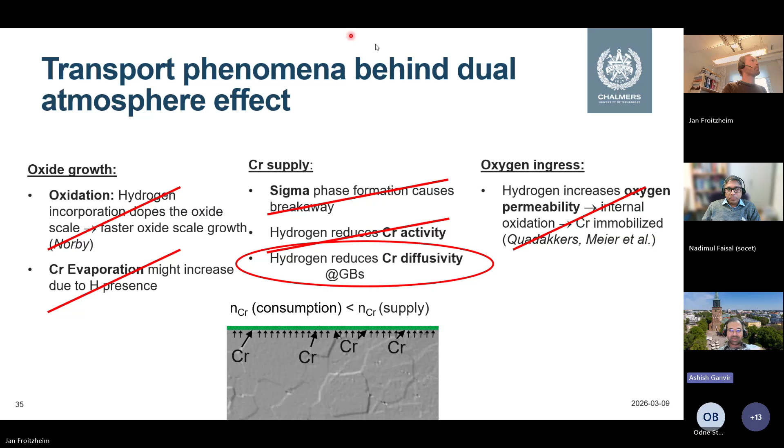Yes, of course. I was typing it, but maybe it's best to just answer because it's a bit long to type. So your question for the audience is: from an additive manufacturing perspective, how do we control the porosity and other microstructure defects in cathodes and anodes while maintaining mechanical stability and long-term corrosion resistance in high temperature energy systems?

There are a bit of challenges when it comes to doing laser DED or laser powder bed fusion, especially if you go into the melting mode, because most of these materials are non-metallic, they're ceramics, and they're prone to crack due to these high cooling rates. But there is a way around it—if you operate your system in a sintering mode, then you may be able to still do it. But on the thermal spray side, yeah, okay.